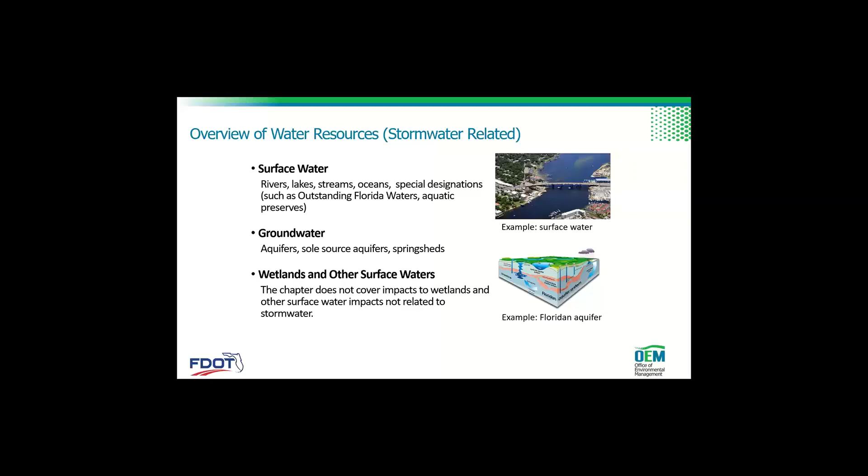Okay, so an overview of water resources. This is going to be stormwater related, talking about surface water, rivers, lakes, streams, oceans, and special designations such as outstanding Florida waters and aquatic preserves, and groundwater, aquifers, and springsheds. And then wetlands that relate to stormwater.

So the procedure overview: projects' impacts to water resources must be evaluated regardless of whether it's a federal or state requirement. We do this through the water quality impact evaluation checklist. I use the term WIKI for that. This is required for projects that go through the ETDM screening process.

So the level of evaluation needed is going to depend on your project, the area that you're in, the involvement with the water resources, the quality of those water resources, and then potential impacts from your project, and then the potential for implementing non-traditional water quality improvements and sole source aquifers.

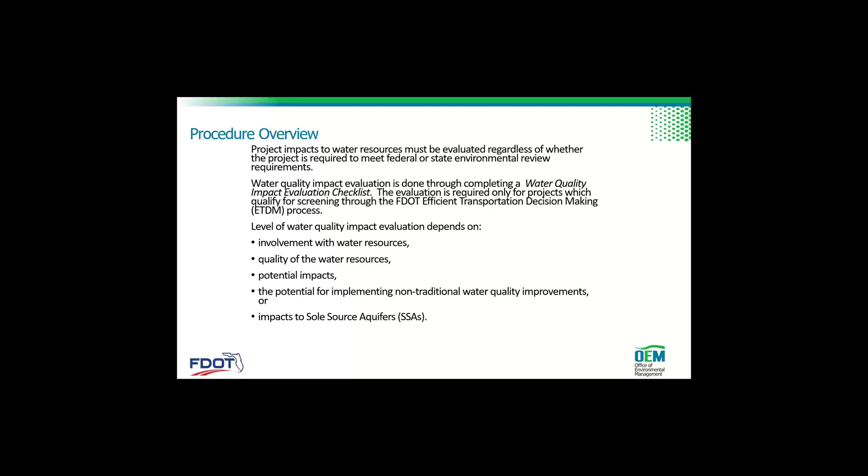Regulatory agencies and stakeholder coordination: state and federal agencies, and local and regional stakeholders. We want to coordinate with the Basin Management Action Plan and Reasonable Assurance Plan stakeholders such as FDEP or water management districts. Early coordination through the planning phase and efficient transportation decision-making, the ETDM that Ruth talked about yesterday. So the goal is to identify the water resources and explore opportunities for joint stormwater projects that can address those issues with stakeholders. As I said, the ETAT members for this would be DEP and the water management districts.

In the environmental look around, this is a process to obtain current water resource information by proactively looking for opportunities for joint stormwater management projects with agencies and stakeholders. The anticipated action would be to explore the watershed-wide stormwater needs and explore innovative approaches to meeting your permit requirements. So the project manager should convene ELA meetings after the stormwater management requirements are estimated and before the stormwater design decisions are established. More information can be found in the FDOT drainage manual.

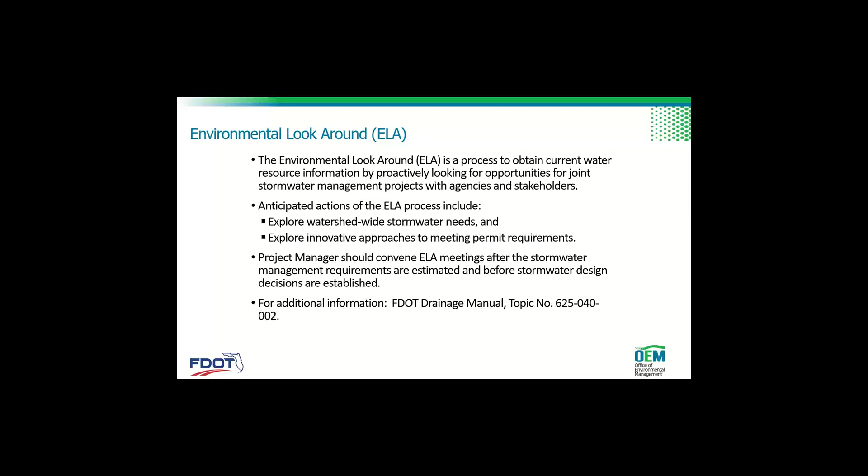Projects not qualifying for ETDM are the ones that have no significant effect on water quality, so those would be a non-major state action. And as we discussed yesterday about ETDM, you have the planning screen and programming screen.

The planning screen is where we're going to identify the potential resources to discuss with the other agencies, the ETAT members, and then the programming screen is going to include the district drainage engineer and permit coordinator to explore opportunities for stormwater treatment, and help scope the water quality evaluation. So there's a lot of information identified during ETDM. I'm not going to read through these, but there's surface water and then there's groundwater information.

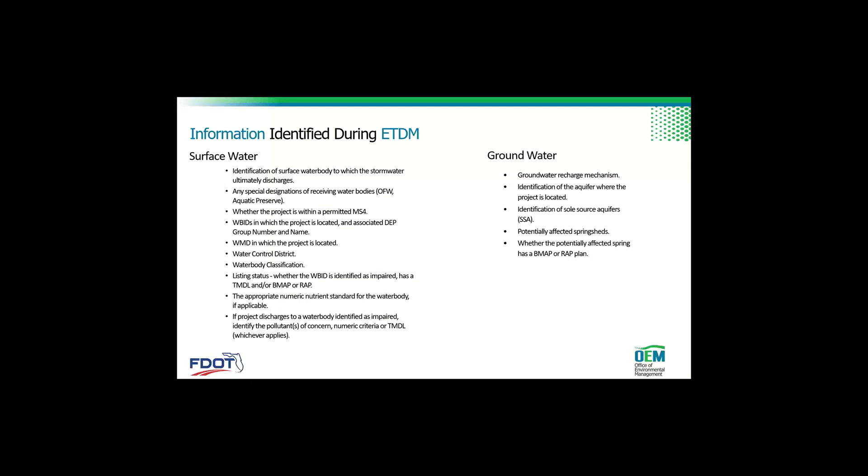So now we're going to go through the WIKI, the water quality impact evaluation. This is like a checklist. The purpose is to identify and characterize existing water resources in the project area, and then to assess the project's potential impacts to water resources, identify and evaluate mitigation measures, and then document everything.

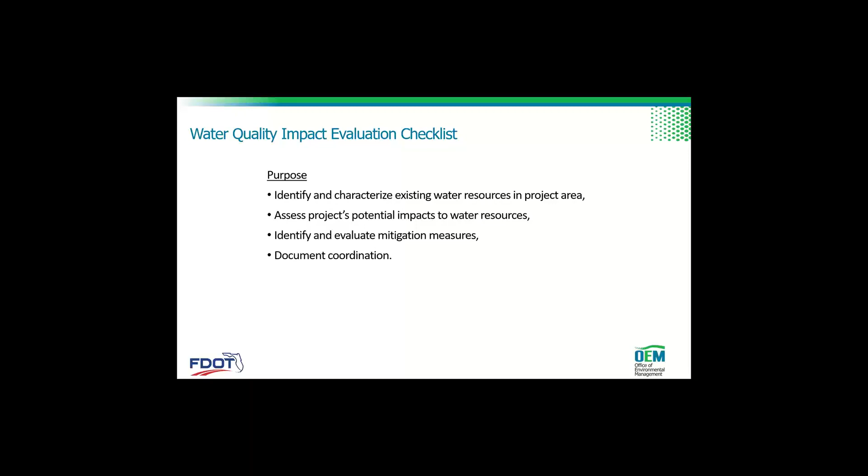So the process: convene an ELA meeting prior to completing the checklist, and then complete the checklist based on the outcome of the ELA meeting, and then use the checklist to guide the drainage design, and complete the checklist prior to finalizing pond siting analysis. The checklist is required for each alternative unless the alternatives are in the same drainage basin. Summarize the results in the environmental document and the preliminary engineering report, or PER.

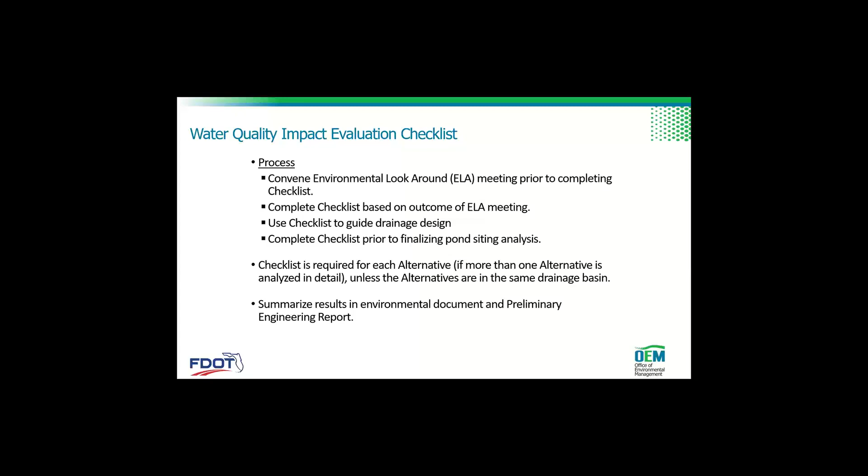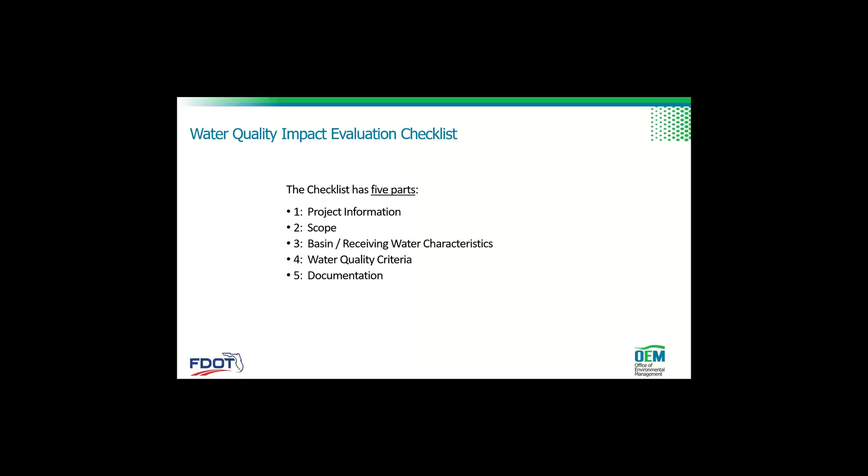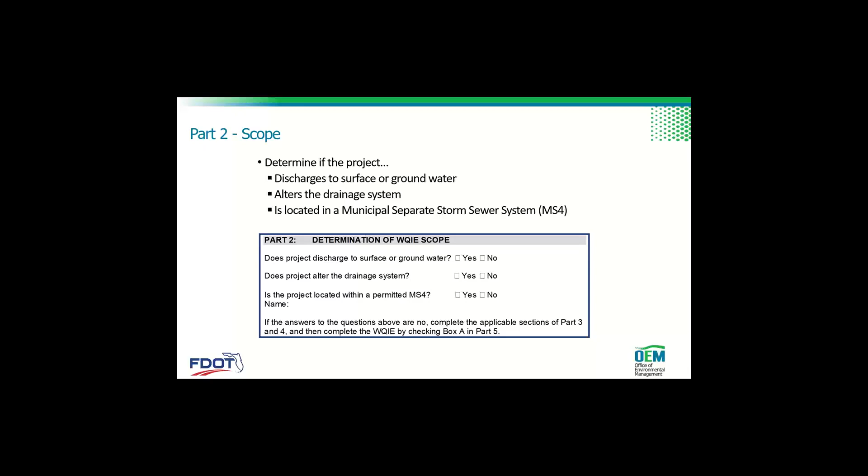And then part 2, the scope. They determine if the project discharges to surface or groundwater, or alters the drainage system, or is located in a municipal separate storm sewer system. And part 3 is where we get the information about the basin and receiving water characteristics.

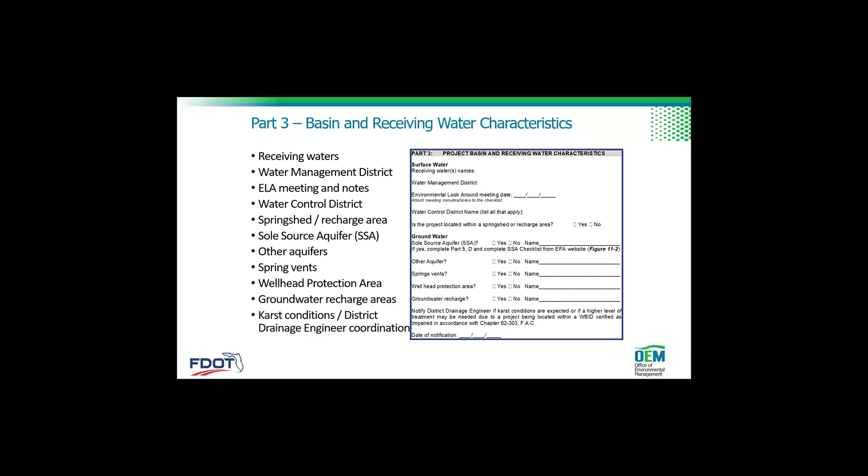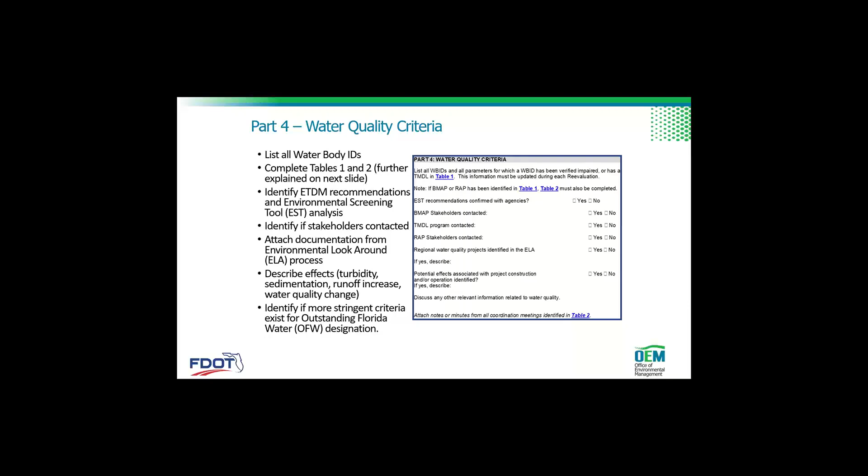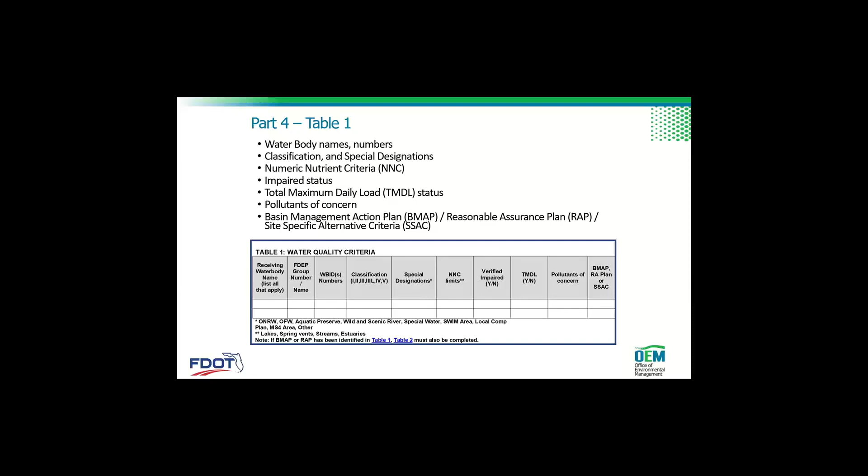Part 4 talks about the water quality criteria, the BMAPs, the TMDLs, and the RAPs. We'll get into some of that stuff a little bit later. And then it has some tables to put in the water body names and all the information about them, the pollutants of concern and the TMDLs and impaired status. And then a second table to summarize the coordination efforts and to have the contacts and identify if coordination is needed after the PD&E phase.

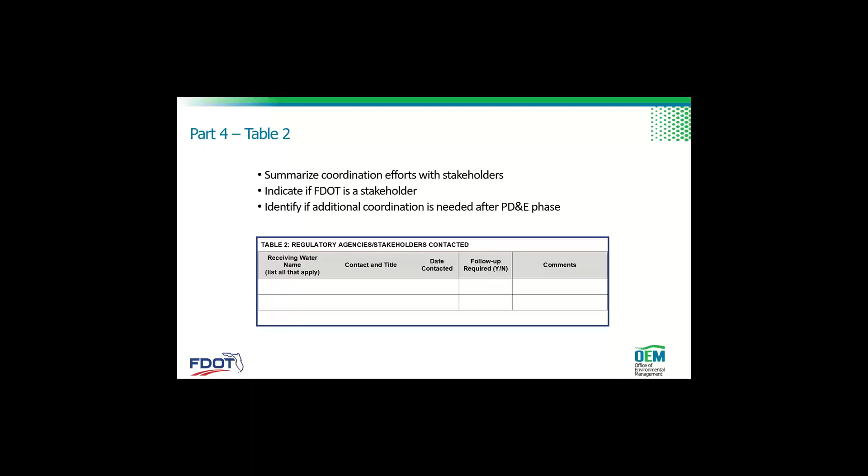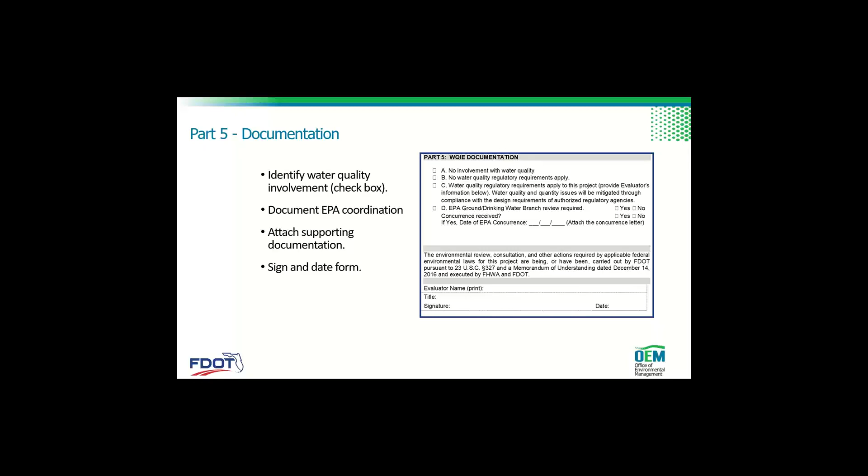And then part 5 is documentation. Sorry, I went too fast there.

So in the environmental document, we're going to summarize the water resources involvement and impacts, and then summarize stormwater features such as the ponds needed to address water resource impacts, and state whether a project will meet criteria and requirements for the stormwater quantity and quality. And then we want to maintain the water quality impact evaluation checklist in the project file. And for commitments, see part 2, chapter 22, for guidance.

We might have basin management action plan or reasonable assurance plan commitments, environmental look-around commitments, other actions required to advance the project such as contractor actions, retrofitting structures to increase water quality treatment, building water quality improvement features, actions to increase or improve water quality treatment, hydrologic enhancement, recharge or reuse projects, continued coordination with water resource agencies, or commitments must be coordinated with other FDOT offices.

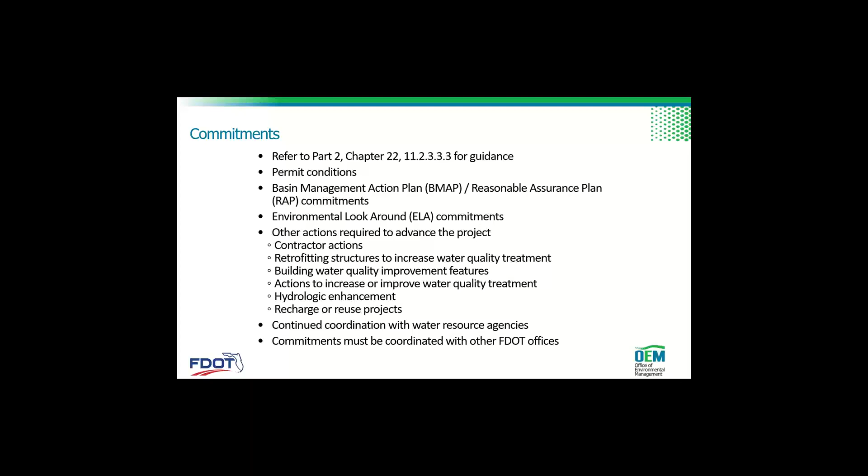So for permits, see Part 1, Chapter 12 of the PD&E manual, and we'll have permits related to NPDES, National Pollutant Discharge Elimination System. DOT has a statewide stormwater management plan that we follow

to meet those NPDES requirements. And then we might have permits for total maximum daily load based off the Basin Management Action Plan or Reasonable Assurance Plan. And then we might need an environmental resource permit.

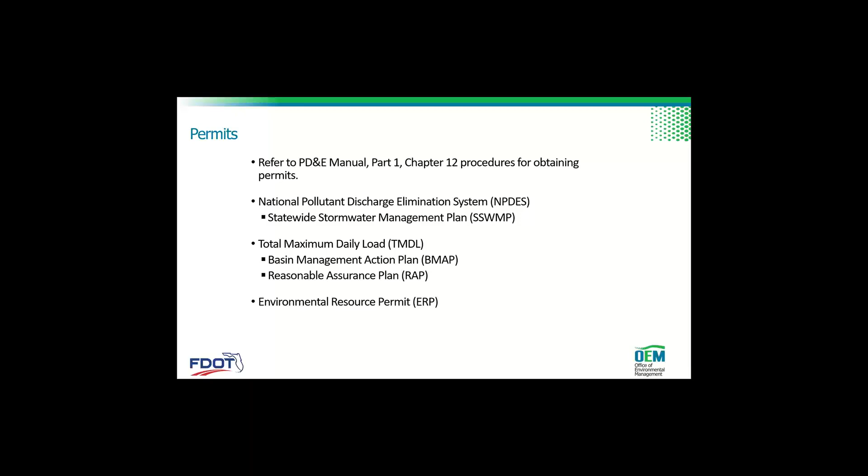So for the NPDES, it was established by the Clean Water Act, and it regulates water pollution caused by MS4s and small construction activity between 1 and 5 acres. The NPDES permit program is administered by the FDEP, and it's different from the ERP program.

As I said earlier, FDOT is a regulated MS4 operator and has a statewide stormwater management plan, which defines our actions, methods, and procedures to reduce pollutant discharge.

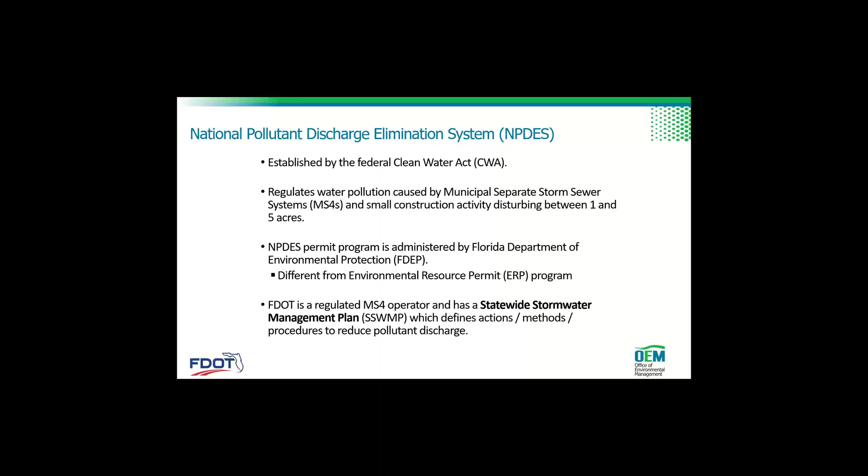So as an MS4 operator, we must obtain an NPDES stormwater permit and implement a statewide plan that describes the activities to be conducted, methods to be used, and procedures to be followed to reduce the discharge of pollutants from its MS4s to the maximum extent practicable. Techniques include management practices, control techniques, system design, and engineering methods.

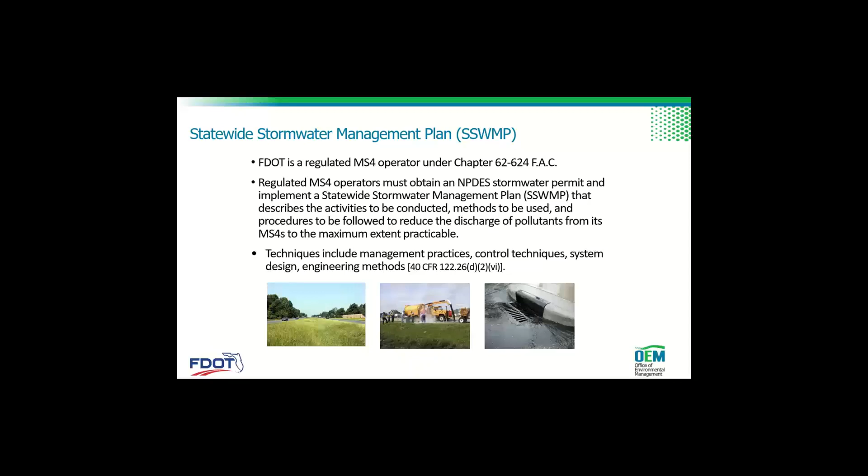So for total maximum daily load requirements, these are established by the Florida Watershed Restoration Act, and it promotes improvements in water quality by controlling both point and non-point sources. It's adopted for waters identified as impaired by FDEP.

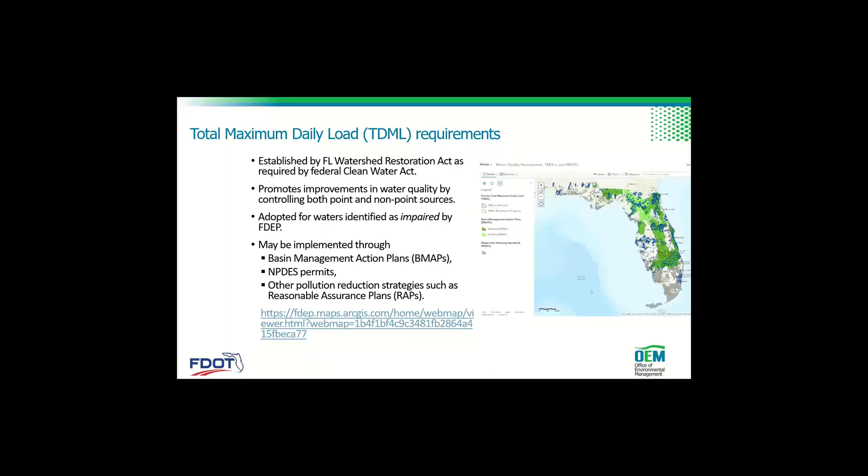And this map on the right shows these impaired waters. It has the BMAPs in green, and in blue is that which has the TMDLs adopted. There's a link to that website at the bottom.

Okay, so for an environmental resource permit, this is administered by the water management districts. The ERP regulates alteration of surface water flows and protects functions of wetlands and other surface waters. It prescribes stormwater pond sizes and types, and it regulates stormwater discharge restrictions leaving FDOT right-of-way.

It typically requires a post-development discharge not to exceed pre-development discharge. However, in areas with flooding or limited stormwater conveyance infrastructure, it may require post-development discharge to actually be less than the pre-development discharge.

And so the ERP should be obtained prior to construction and after phase 2 design plans.

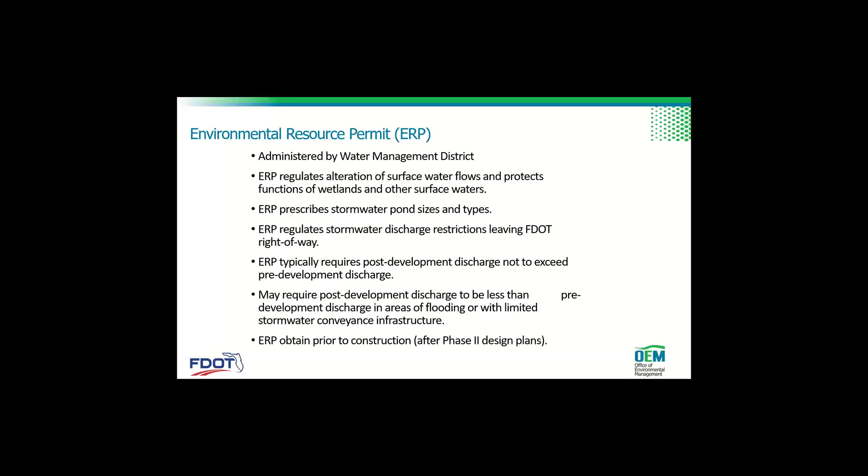So for drainage and pond siting, water quantity impacts associated with transportation projects are usually addressed through permitting of stormwater management systems, like a pond. So general permit requirements prohibit FDOT stormwater projects from causing adverse water quantity impacts to receiving

waters and adjacent lands, causing adverse flooding to on-site or off-site property, or adversely impacting existing surface water storage and conveyance capabilities, adversely affecting the quality of receiving water such that the state water quality standards will be violated, and causing adverse secondary impacts to water resources.

Adversely impacting the maintenance of surface or groundwater levels or surface water flows, and adversely impacting a Work of the District. So general permit requires stormwater systems to be capable of performing and functioning as proposed and to comply with any applicable special basin or geographic area criteria.

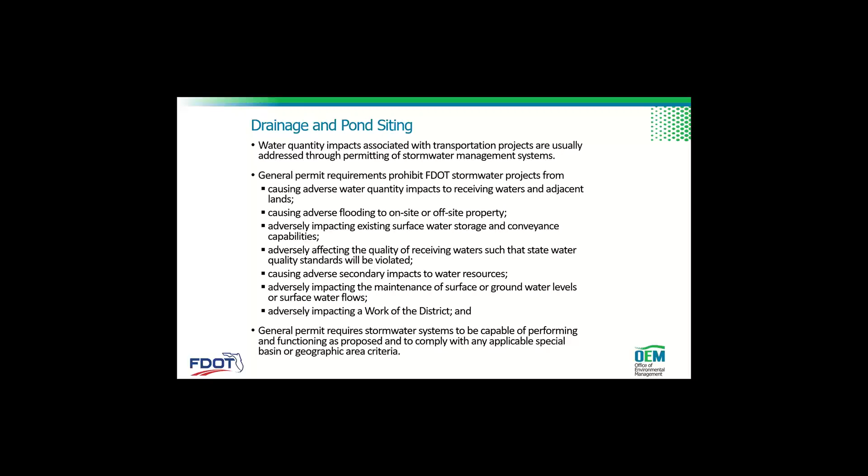All right, so drainage concepts and stormwater pond locations are established during PD&E to evaluate potential impacts to environmental resources. I know we do surveys like cultural or historical surveys and contamination assessments on some of these ponds.

So for each alternative, the PD&E should identify the drainage issues, the overall stormwater management approach, possible stormwater design concepts to mitigate runoff, and general size and potential locations of stormwater management facilities. And we want to document this in a concept drainage design report or a pond siting report, and it should be summarized in the PER and the environmental document.

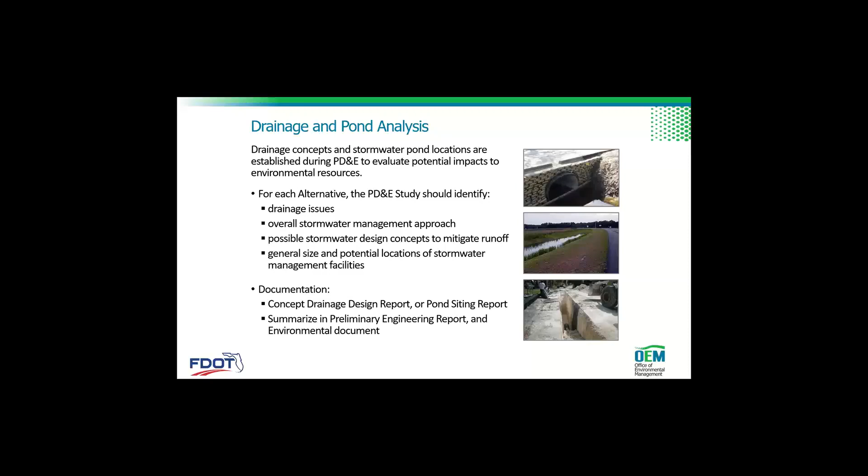So the concept drainage design report is for when you don't have pond needs. So like, for example, in an urban area where adjacent land is fully built out and you don't have ponds, or you don't need right-of-way for ponds.

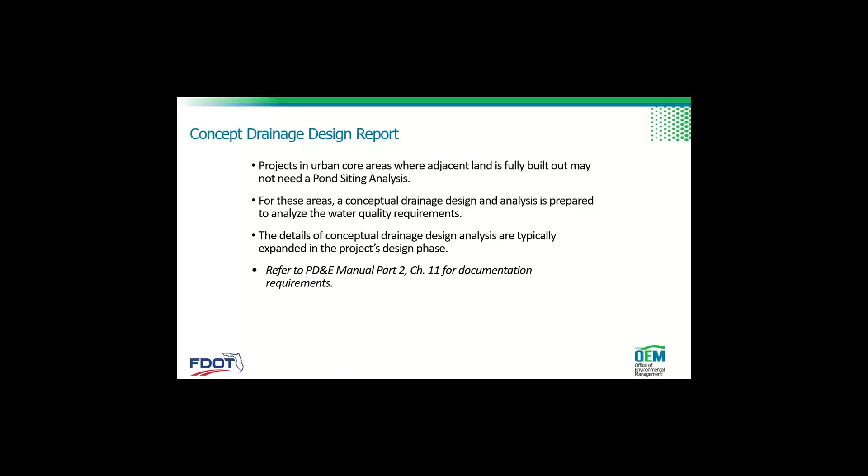For these areas, a conceptual drainage design and analysis is prepared to analyze the water quality requirements. And the details of conceptual drainage design analysis are typically expanded in the project's design phase. This is covered in Part 2, Chapter 11 of the PD&E manual.

All right, so for the pond siting analysis, the pond siting report: all stormwater ponds requiring right-of-way acquisition require a pond siting evaluation. So the location of the ponds for the preferred alternative must be evaluated for potential impacts to human, natural, cultural, and physical environment.

An exploration of innovative opportunities such as regional facilities, joint use facilities, and stormwater reuse systems through the ELA process should be exercised.

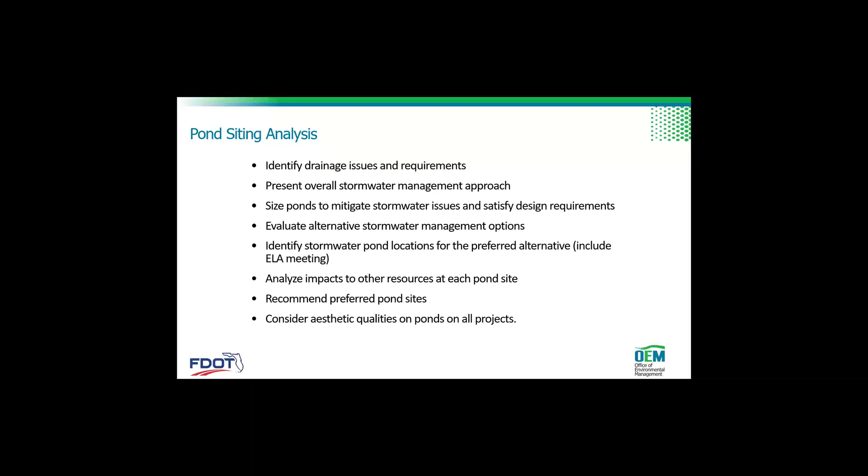Okay, so in a pond siting analysis, we're going to identify drainage issues and requirements, present overall stormwater management approach, size ponds to mitigate stormwater issues, and evaluate alternative stormwater management options, identify stormwater pond locations for the preferred alternative, and analyze impacts to other resources at each pond site, and recommend preferred pond sites, and consider aesthetic qualities on ponds on all projects.

So opportunities for joint stormwater projects: when developing stormwater treatment and storage needs, identify the regulatory and regional issues and opportunities for cooperative solutions. The benefits of joint projects are they're more long-term and cost-effective, and they allow FDOT to be good stewards of water resources.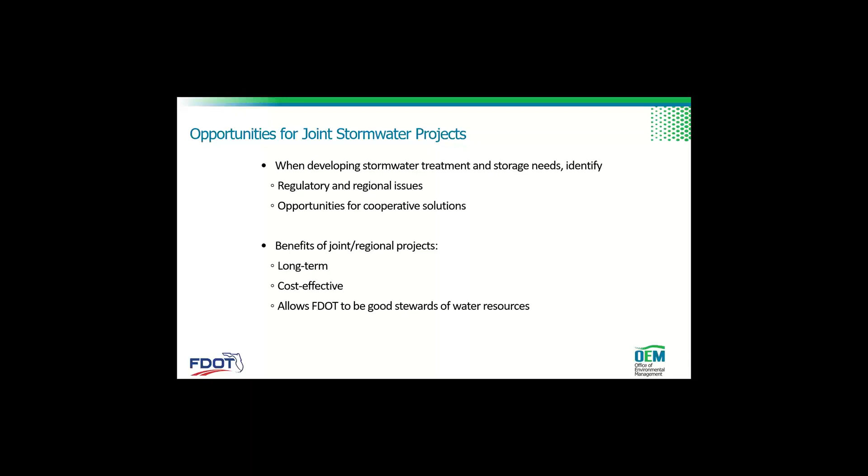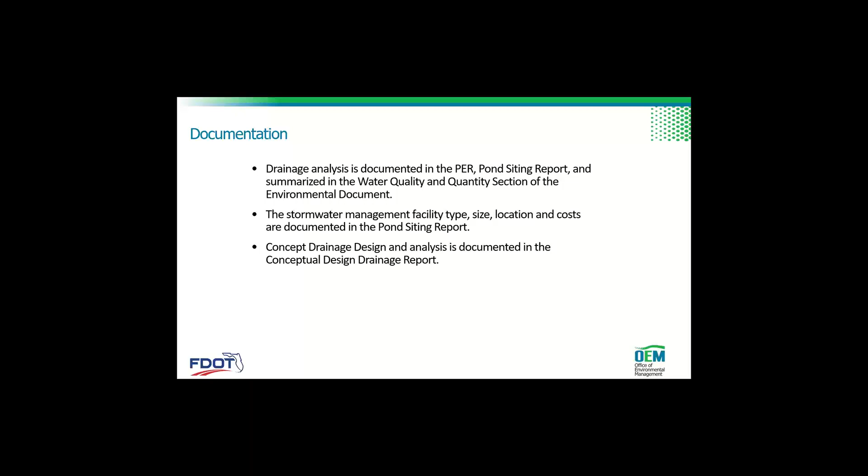And finally, we're going to document everything that we've talked about. So drainage analysis is documented in the PER, the pond siting report, and summarized in the water section of the environmental document. The stormwater management facility type, size, location, and costs are documented in the pond siting report. And the concept drainage design and analysis is documented in the conceptual design drainage report.